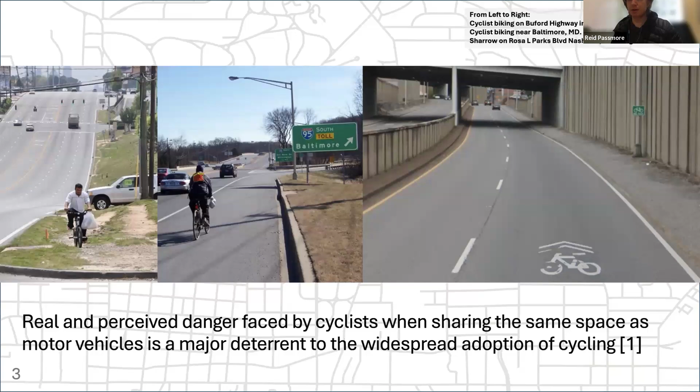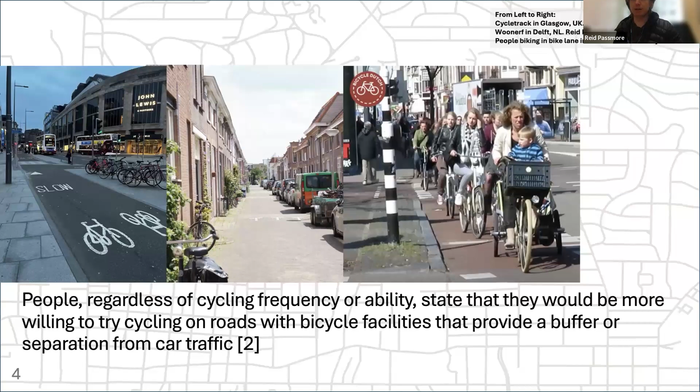Starting with the introduction: the real and perceived danger faced by cyclists when sharing the same space as motor vehicles is a major deterrent to the widespread adoption of cycling. People, regardless of cycling frequency or ability, state that they would be more willing to try cycling on roads with bicycle facilities that provide a buffer or separation from car traffic.

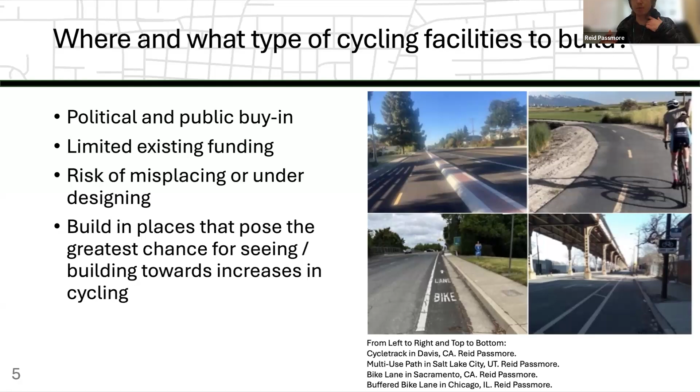But with these facilities, the question is, where do we put them and what types specifically do we build? They require political and public buy-in when there's often limited existing funding sources for them. There's also a risk of misplacing or under-designing bicycle facilities to the point that no one ends up using them. So ultimately, we want to build these facilities in places that pose the greatest chance for seeing or building towards future increases in cycling.

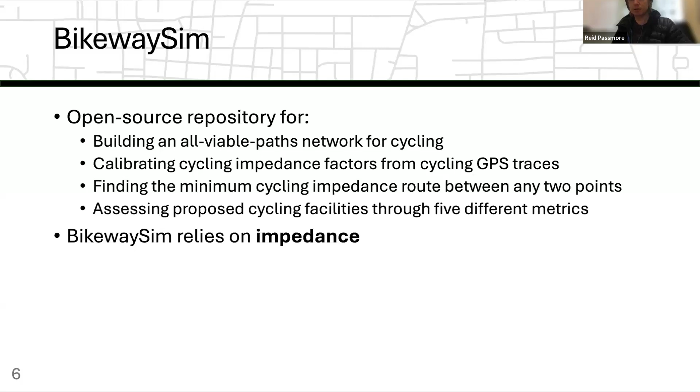To accomplish that, my dissertation was largely aligned with creating this tool called BikewaySim. It's an open source repository for building an all-viable-paths network for cycling, calibrating cycling impedance factors from cycling GPS traces, finding the minimum cycling impedance route between any two points, and assessing proposed cycling facilities through five different metrics. So BikewaySim primarily relies on impedance.

Impedance represents the relative cost or difficulty of travel. It can be in time units, dollars, or it can also be unitless. And it's relative, meaning that the difference between alternatives is what matters most. So for motor vehicles, impedance factors, which represent the different aspects of impedance, include travel time, parking, and tolls.

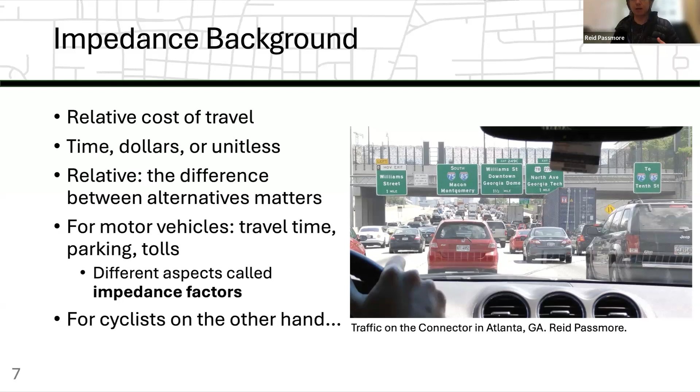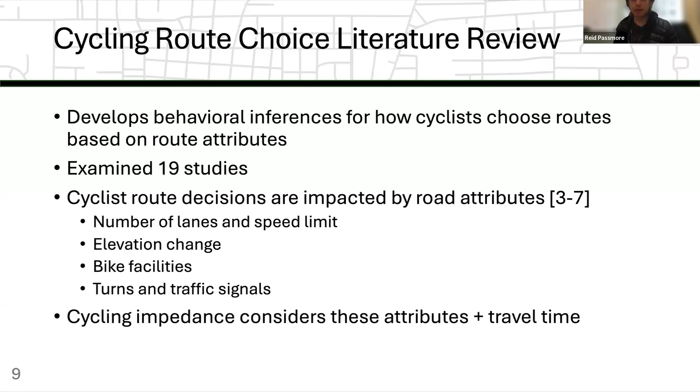But for cyclists, on the other hand, I had to consult the cycling route choice literature. Cycling route choice develops behavioral inferences for how cyclists choose routes based on route attributes. I looked at 19 different studies which showed that cyclist route decisions are impacted by road attributes, such as the number of lanes, the speed limit on a road, the elevation change along a route, the presence of bicycle facilities, and the frequency of turns and traffic signals. Ultimately, cycling impedance has to consider these attributes in addition to travel time.

When I was examining the cycling route choice literature, one gap that stood out to me is that while there was plenty of literature on estimating cycling route choice models, there was limited literature on actually applying these route choice models for estimating cycling impedance factors, which I'll get to in a future slide, and for planning bicycle facilities.

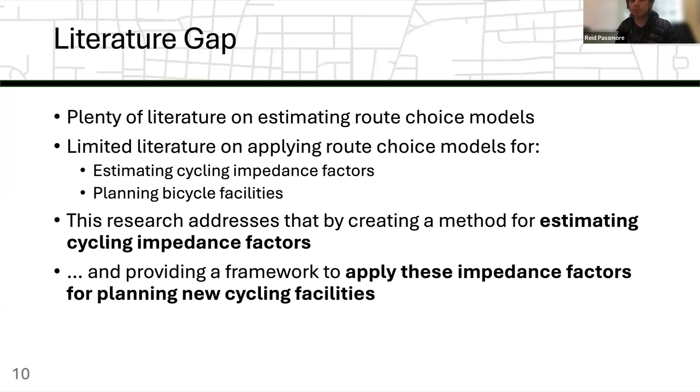This research addresses this gap by creating a method for estimating cycling impedance factors and then applying these impedance factors in a framework that can be used to plan new cycling facilities.

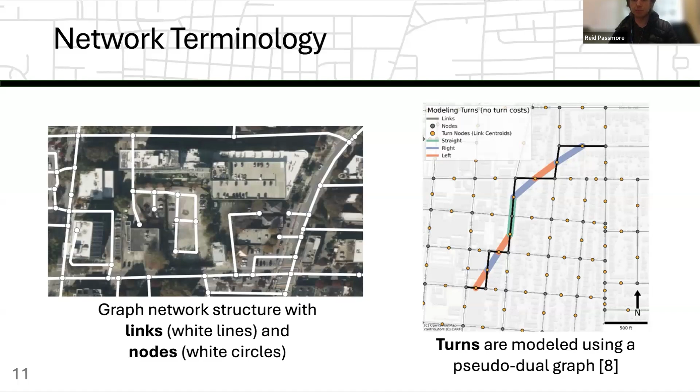Modeling routes with impedance factors: impedance functions are what actually apply the impedance factors to the network links and turns. Dijkstra's algorithm can then be used to find the least impedance route between any two points. If travel time is the only impedance factor being used, the resulting route is the least travel time route.

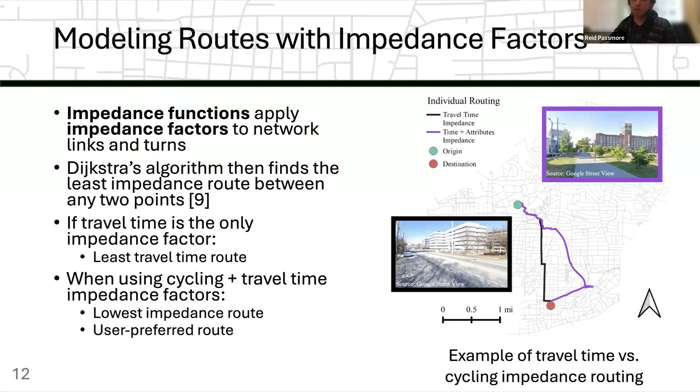The route on the right in purple takes the figure bordered in purple, the Atlanta Beltline multi-use trail. This is a lot more pleasant to bike on because you're separated from motor vehicles. But as we can see in the graphic, the purple route is more indirect. The impedance directs it off of high-stress facilities, such as that 4-lane arterial, and onto the multi-use path.

The next question is, how do we actually get these impedance factors to do this kind of work? In this work, we directly estimate them from cycling GPS traces, which I'll describe in the next slide.

We're utilizing a method, or building on top of a method, started by Schweizer et al. 2020, using stochastic optimization to estimate these impedance factors.

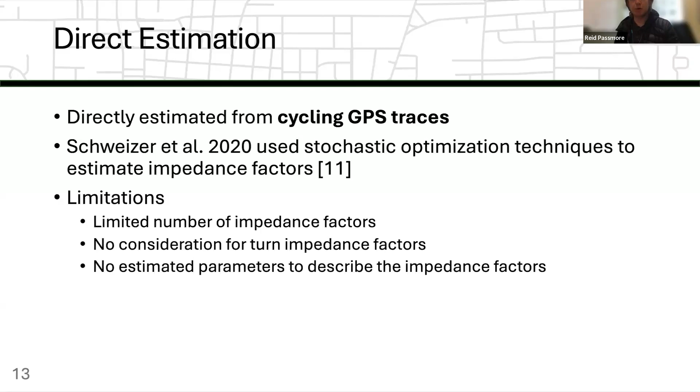Some limitations of this approach that we addressed in this work: they didn't consider very many impedance factors, and there was no consideration for turn impedance factors. And lastly, maybe most importantly, there weren't estimated parameters to describe the impedance factors, which I'll get to in a future slide.

A cycling GPS trace shows the second-by-second trajectory data of a cyclist, which shows how they navigated through a network. These traces have to be map-matched to the network.

Look at the figure on the right. The black dots represent the GPS trace, the second-by-second trajectory data. This data alone does not tell you which sequence of links were taken. That's what the map matching process does, and the red represents the map matching process.

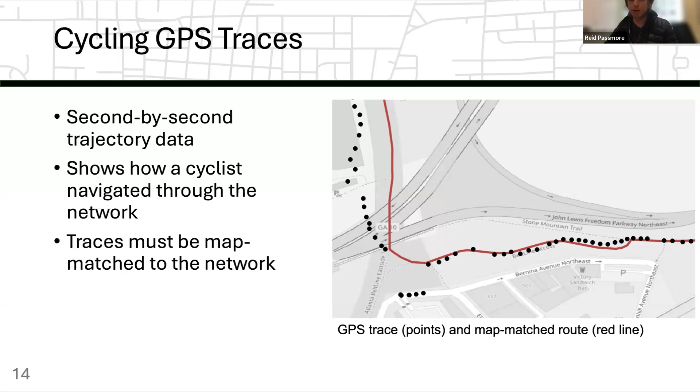So those are cycling GPS traces, and now that we have our direct estimation method, I'm going to describe the BikeWaySim impedance factor calibration methodology.

The optimization algorithm that we used was called particle swarm optimization. There are two main things I want to convey with this type of algorithm: one, it's population based.

We're testing multiple sets of candidate impedance factors, or cycling impedance factors, simultaneously. It also incorporates randomness, meaning that the initial selection of those candidate impedance factors, and the subsequent updates as the algorithm proceeds, incorporates randomness in how it updates.

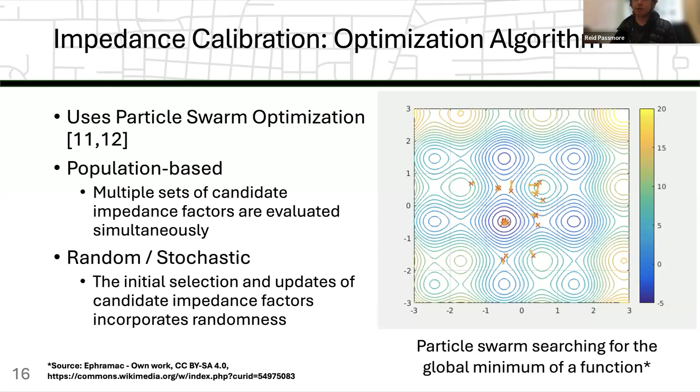A simple visualization of this process is shown on the right. We have these x's that start distributed throughout the graph, and they converge on what is the global minimum for this example function. We can see as the number of iterations proceeds, it starts to hone in. So that is a little bit about how that works.

Now I want to describe what the objective of this optimization process is for impedance calibration. Using link and turn impedance factors, which I'm going to represent with betas, we want to maximize the average similarity between the chosen and the modeled routes.

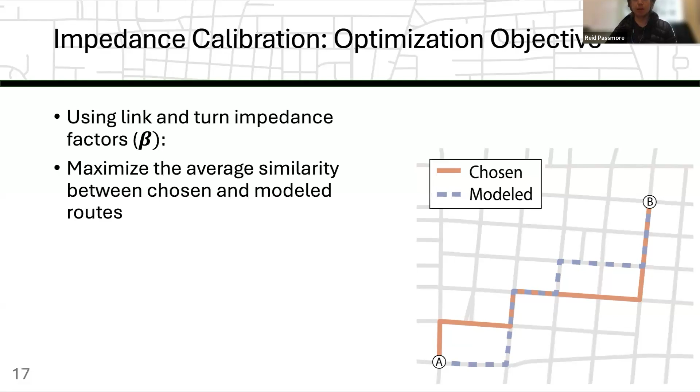This figure on the right shows the chosen route in orange, and the modeled route, modeled with our impedance factors, in a blue dashed line. It goes between point A and point B. We want to maximize the similarity between these two lines, and the way we do that is through the Jaccard index.

The Jaccard index measures the intersection of two objects over their union. This value is always between 0 and 1, 0 being no similarity whatsoever, and 1 being complete similarity.

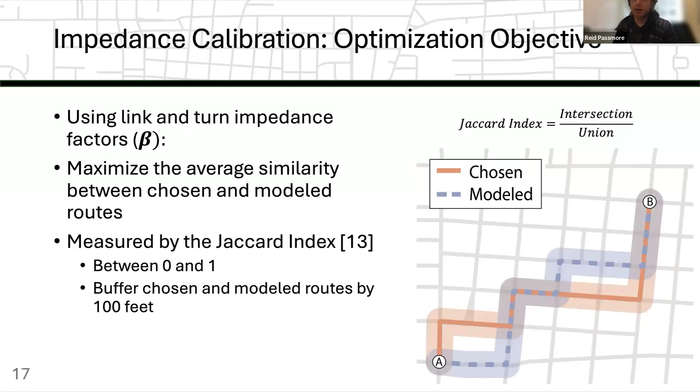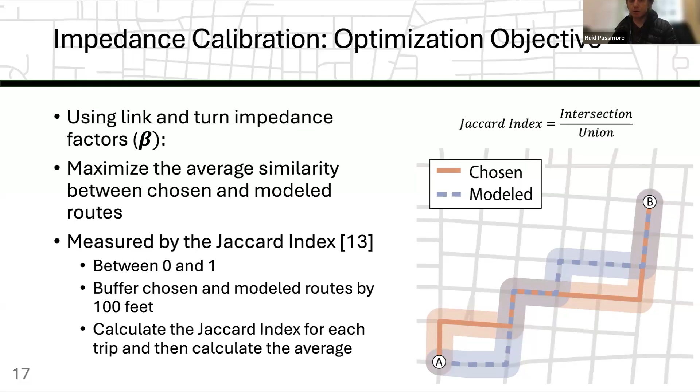The area of the routes, or the buffered area of the routes, are both buffered by 100 feet, and this area is used as the basis for calculating intersection and union. Essentially, we find the intersecting area, and then divide it by the net area or the union of the area. That gives us the Jaccard index for that trip, and then we average that across all the trips to get an average similarity metric.

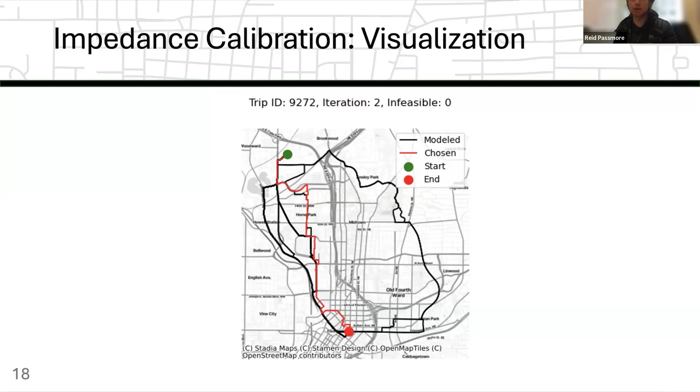The optimization method we're using is population-based, so there are multiple routes being tested at once. We can see it's searching throughout this street network, covering a wide variety of different routes, and some of these are closer to the chosen route than others. That is generally how that process proceeds.

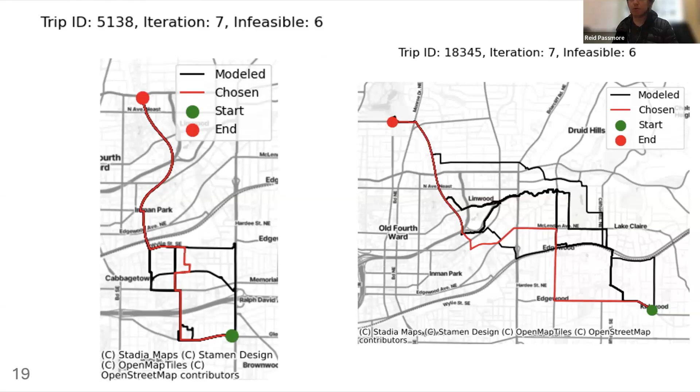It's important to remember that this is occurring across many trips at once, so whatever the final modeled route is, the resulting optimum route won't necessarily be the optimum for that one trip.

So that's the optimization process, and there's one additional step we add: the bootstrap method. This was developed by Efron and Tibshirani, and it allows us to estimate parameters for those impedance factors—the mean, the standard error, and the confidence interval—that would normally be infeasible to estimate by analytical means.

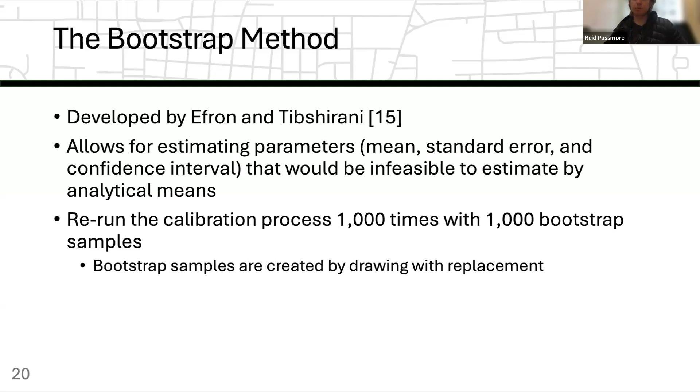Essentially, we rerun the calibration process 1,000 times with 1,000 bootstrap samples, where the bootstrap samples are created by drawing with replacement from our sample of chosen routes. So those two components, the optimization and the bootstrap method, make up the calibration methodology.

Now I'm going to go over what it looks like once we actually use real data. The GPS traces we're using come from an app called Cycle Atlanta that collected crowdsourced cycling GPS traces between 2012 and 2016. After processing and map matching this data, we had around 2,500 unique trips across 650 users.

We split this data into a training and a testing set. The training set incorporated one trip from each user selected at random, and the testing set was the remaining trips that were left over.

Next I'm going to go over the impedance factor coefficients, or the network variables that we used. I first want to direct your attention to the table. Starting with the first column, this indicates if the impedance factor was a link or a turn impedance factor. Moving on to the second column, this indicates the general category.

We had categories for the number of lanes, speed, the grade of the road, the presence of cycling facilities, a turn characteristic variable, and the type of turn movement. The third column, the last column, represents the actual specific variable name.

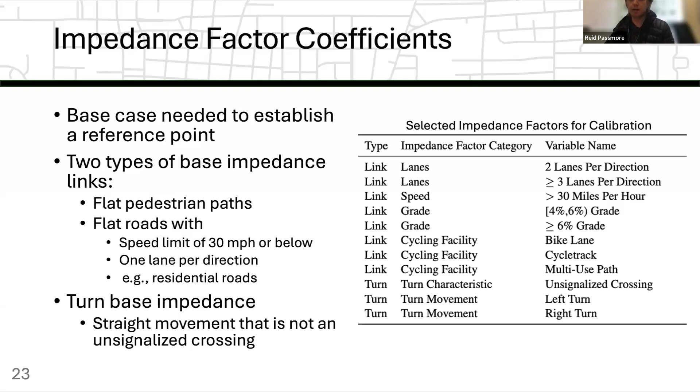Okay, moving on to the bootstrap model results. This is the large table that I want to walk through. The first column represents whether it was a turn or a link impedance, and the next column describes the units.

One thing I didn't describe in the previous slide was that link impedance is in proportional time units. So whenever we look at the beta values, which are in the mean column, it's going to represent a proportional increase in travel time. If it's a turn impedance, it's going to add just travel time, so it'll be in minutes.

So whenever we go to the beta values, starting at the first row and the column that says mean, it's 0.17. That indicates that the impedance relative to the base impedance, which is link travel time, is increased by 0.17 proportionally. If we go down to the turn column and see 1.22 for that unsignalized crossing variable, that indicates 1.22 minutes were added as a result of that impedance.

Proceeding, we have our variables, in the same order as the previous slide. Then we have our search bounds. One thing to mention is that particle swarm optimization is bounded, so you have to select some initial search bounds to start the process of searching for the optimum set of impedance factors. You can go outside the search bound in this process, but whenever you select your initial value, it starts in this area.

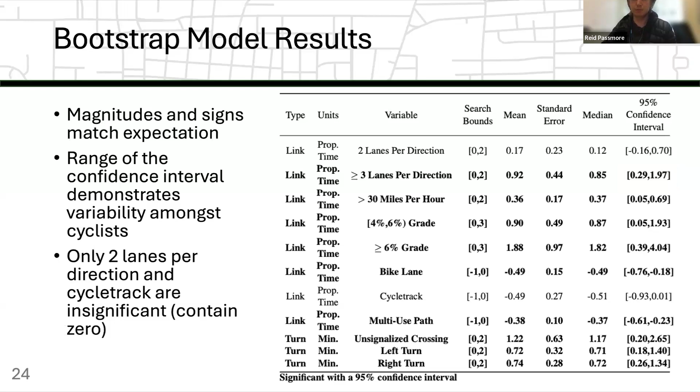All right, this next slide is going to show you how the different impedance factors combine. The first column is for the speed limit, the next column is for the lanes per direction, and the following 4 columns are different link types. The first is a pedestrian path.

The second is a multi-use path, and then a road with a bike lane. So the main things I want to get from this are first the link base impedance. So we set these to be pedestrian paths and then roads with a speed limit less than 30 miles per hour, and then 1 lane per direction. So that shows up as 0 as we set it to be.

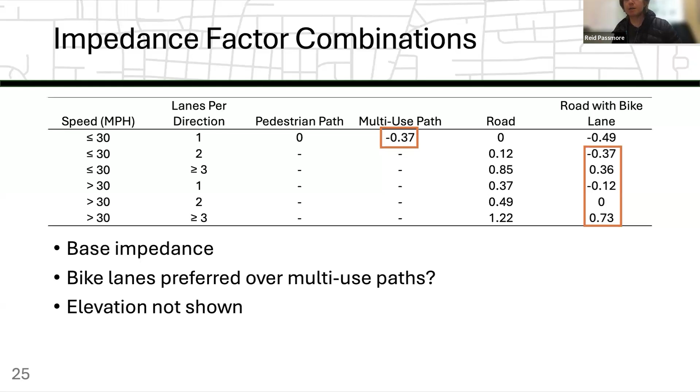And then the other thing you may have noticed from the previous slide is that the road with bike lane impedance factor is actually more negative, meaning it has a greater impedance reduction effect than the multi-use path variable. This may seem counterintuitive initially because multi-use paths provide complete separation from motor vehicles. But once you consider that bike lanes can interact with other impedance factors roads have, such as speed limit and lanes per direction, it starts to make more sense. So as you increase the speed or lanes per direction, that impedance reduction effect from bike lanes starts to dwindle.

All right, next I'm going to go over the objective function value. So again, the objective function was this Jaccard index that ranged from 0 to 1, and we recalculated the Jaccard index for each trip using the median impedance factors from that bootstrap model table a while ago. And then when we calculated the average for the training set, the calibrated impedance factors value was 0.47. And using just the travel time impedance, it was 0.36. So there was a 30% increase from one to the other.

And then for the testing set, that value was 0.43 and 0.37. So that was a slightly less increase in Jaccard index, 16%. So this indicates that there's still room for improvement.

And to further illustrate exactly where these improvements were made in explaining the chosen path, I want to direct your attention to the figure on the right. This is a histogram of the Jaccard index values for each trip using both the shortest impedance factor and the calibrated impedance factor, shown in gray and blue respectively. The x-axis ranges from 0 to 1, since that's the Jaccard index range.

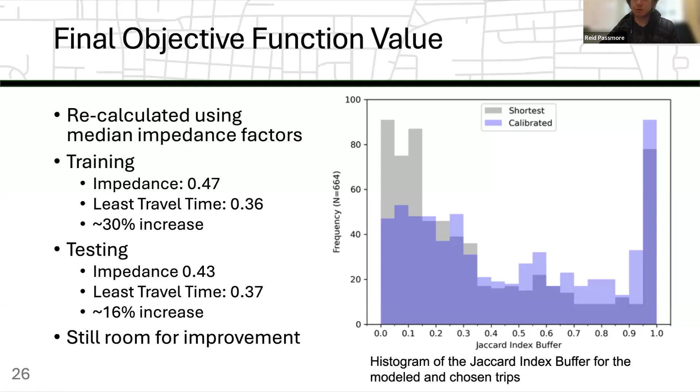And when we're going from the shortest to the calibrated in this 0 to around 0.25 range, we see a reduction, meaning more trips are being explained using the calibrated impedance factors. So the blue distribution is shifting to the right relative to the gray distribution, showing where exactly we're making improvements in explaining those trips.

All right, so some limitations of this approach are that trips have to be destination oriented, meaning travel time must be an impedance. So exercise trips, recreational rides, and group rides cannot be used for this. And loop trips, where the origin and destination are one and the same, also do not work.

There are issues with the Cycle Atlanta data. They tended to be overrepresented by white college-educated men, and this was exacerbated by this being the early smartphone days when this data was collected. The sampling method wasn't the most rigorous used.

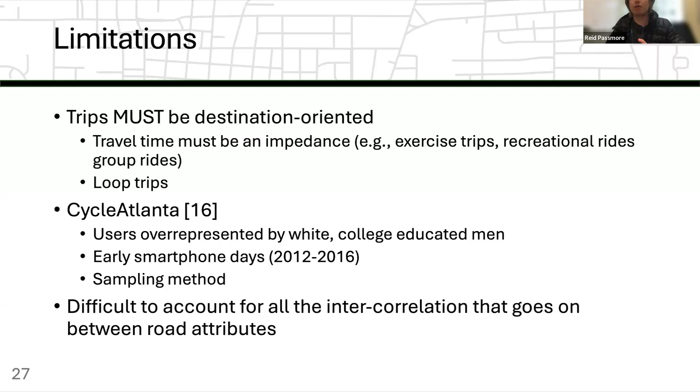And then the last thing associated with this is that whenever we're calibrating the impedance factors, it is very difficult to account for all the intercorrelation that goes on between the different road attributes.

So some future work suggestions associated with this are collecting GPS trace data through travel diaries gathered through more rigorous sampling methods that would hopefully allow us to estimate more generalizable impedance factors. If this is infeasible, one potential idea I had was using suggested routes from local cyclists or advocacy organizations to develop a priori impedance factors that can later be readjusted once actual data is collected. Additionally, collect detailed network data, and these two data collection suggestions in combination will allow us to calibrate more impedance factors as that data becomes available.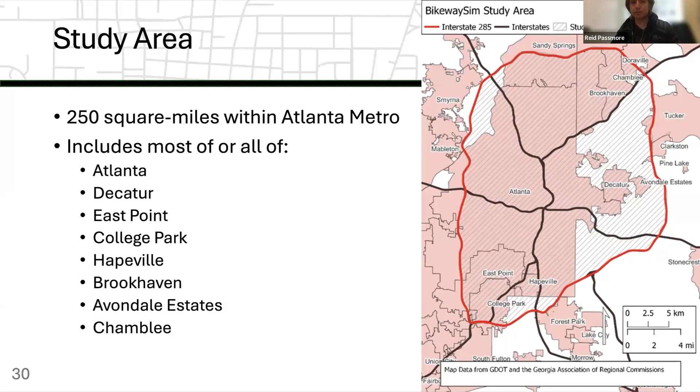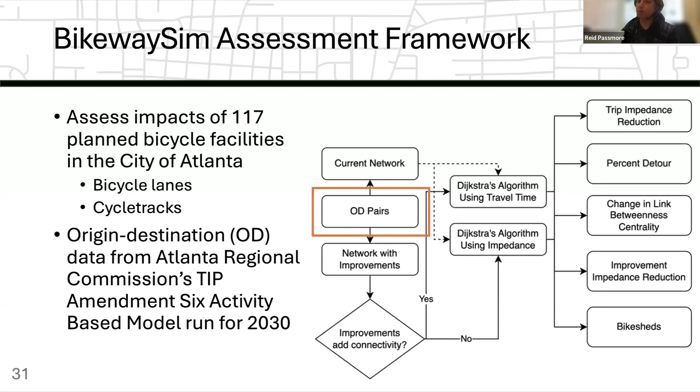We're going to assess the impacts of 117 planned bicycle facilities in the city of Atlanta, including bicycle lanes and cycle tracks. We're using origin destination data from the Atlanta Regional Commission's TIP Amendment 6 activity-based model run for the year 2030. So the first part of this process, we're going to start with the OD pairs.

The OD pairs that we're using correspond to traffic analysis zones. We pre-processed the data to remove any trips above 3 miles and to also remove intrazonal trips. We matched each TAZ centroid to the nearest network node by Euclidean distance so we could do shortest path routing. This led to a final OD count of 1,100 TAZs, constituting 130,000 unique OD pairs, representing 3.5 million trips, which had 650,000 people across 480,000 households.

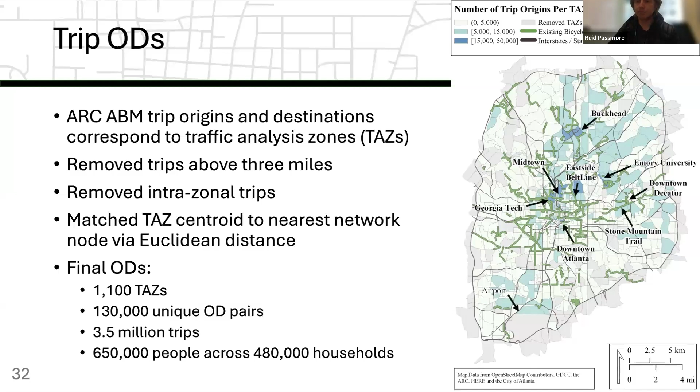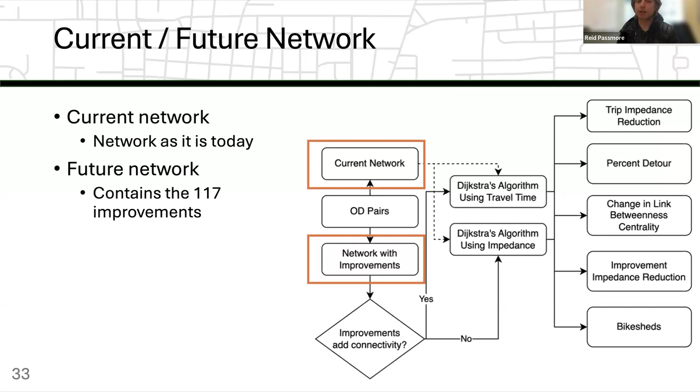All right, next I'm going to move on to the next step of the process. We're going to establish the current network — that is the street network as it is today, so no improvements, just as it is. Then the future network is the network that's going to contain the 117 improvements that we're going to evaluate.

Once we have those two networks, we can use Dijkstra's algorithm to find the lowest cost route between any two points. This is run twice for the current network — first using travel time as the impedance factor, then using the calibrated impedance factors. It's run once for the future network using just the calibrated impedance factors.

These routes are then stored to generate 5 different approaches that show the impacts of the proposed bicycle facilities. Due to time constraints, I'm going to only go over 3 of these, which are trip impedance reduction, improvement impedance reduction, and bike sheds.

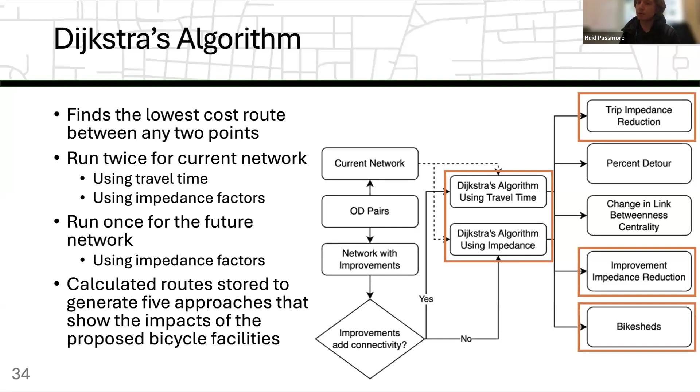This isn't only because of proximity to the added bicycle facilities, but also because there's a lack of existing low-stress bicycle facilities in this area. If you've ever been to downtown Atlanta, there are many one-way streets up to 5 lanes wide that facilitate high-speed vehicle traffic, and they're not pleasant to bike on.

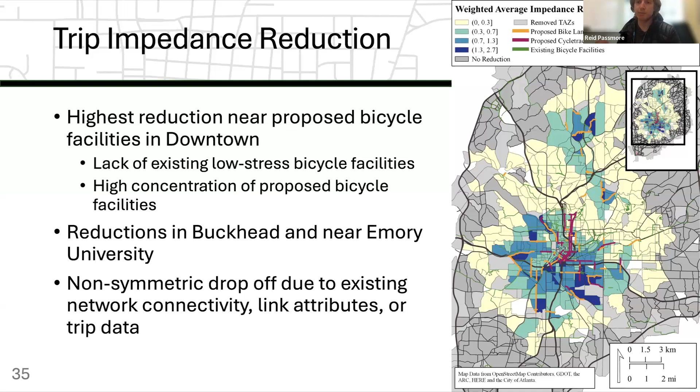If there are many high-stress links or high impedance links near the proposed bicycle facilities, then it's going to limit the bicycle facility's ability to mitigate that. And also, if there are fewer trips from certain TAZs that go to the destinations that utilize the bicycle facilities, then that would also reduce that average impedance reduction.

All right, then the next one I'm going to look at is the impedance contribution from each facility, or impedance reduction contribution from each facility. This metric measures each bicycle facility's effectiveness at reducing trip impedance. So in the previous slide, we were looking at it from that origin or TAZ perspective, and this time we're looking at just the facilities.

This measure considers a link's impedance reduction from the added bicycle facility, the total length of the bicycle facility, which can often span across multiple blocks, so it often isn't contained to just one link. And then it also considers the link betweenness centrality, which measures how many users used a link as part of the least impedance path.

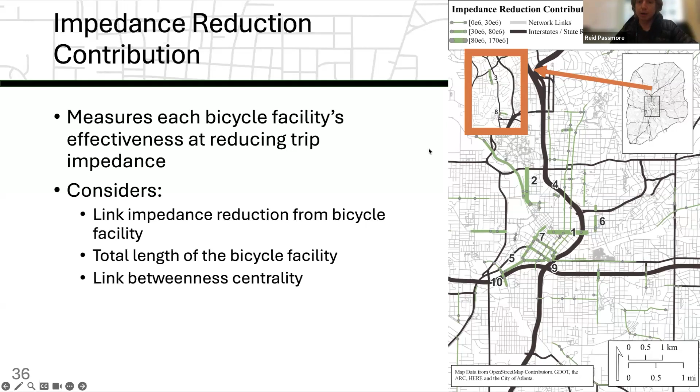A couple things to note about this graph: the green represents the added bicycle facilities, and they are symbolized according to size. So the greater the size of the bicycle facility, the higher the impedance reduction contribution. You may notice that they're labeled with numbers, and these numbers represent a ranking based on the facility's impedance reduction contribution. I also want to point out that this orange box here is to the north of the zoomed in area that we see in the map below.

This was near Buckhead, and I just added it here because some of the higher impedance reduction facilities showed up in this area. So conceptually, as someone familiar with the study area, these results do make sense. This Edgewood Avenue, the one highlighted right now, is a major connector for people that live in the more residential part of Atlanta to get to downtown Atlanta, which has a lot of jobs. So adding a bicycle facility in this area, especially when the highway acts as a border that often decreases the number of alternative routes, this would be a high impact facility.

And then the other one also makes intuitive sense. This is Luckie Street Northwest. It's a major connector between Georgia Tech, which is slightly north of it, and downtown, which is slightly south of it.

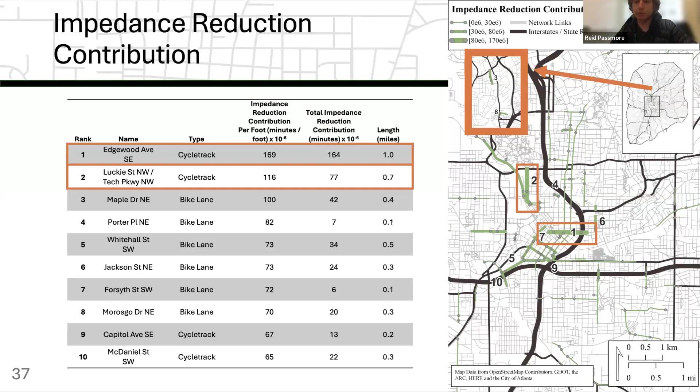All right, so the next metric I'm going to go over is bike sheds. These are localized to a specific origin, whereas the previous ones we had been looking at the entire study area. These start from one point, and represent the extent of the network or destinations one can access by bike within specified constraints.

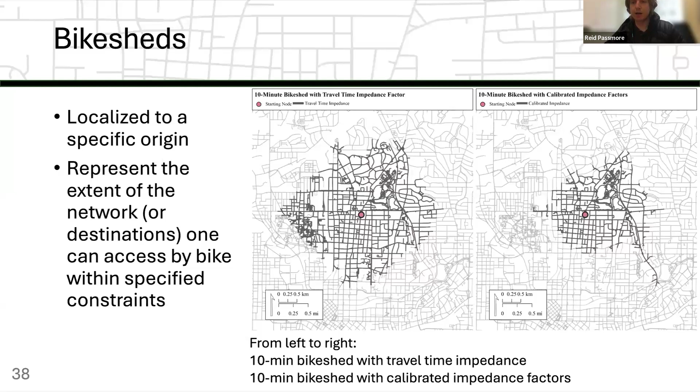What you'll notice is that the black lines, the areas that you can reach, the shape of that is different between the two. That's because when you add in the cycling impedance factors, you're modifying the areas that you can reach, because certain areas are such high impedance that you can no longer reach them, and some areas have reduced impedance so you can now reach them.

So the area here that was added was along the Atlanta Beltline, which is a multi-use path. And if we go back to the bootstrap model table, we know that the impedance factor for multi-use path is negative, so that's why we see that addition.

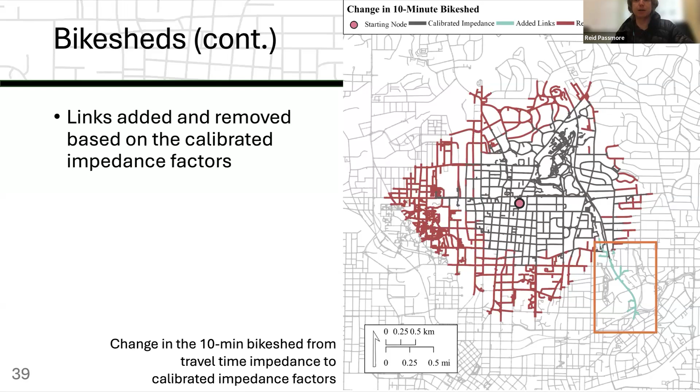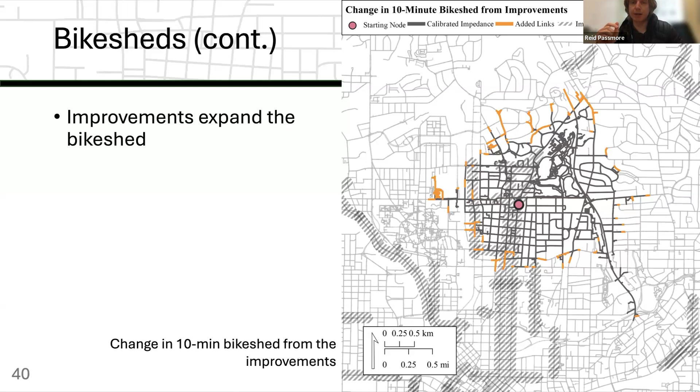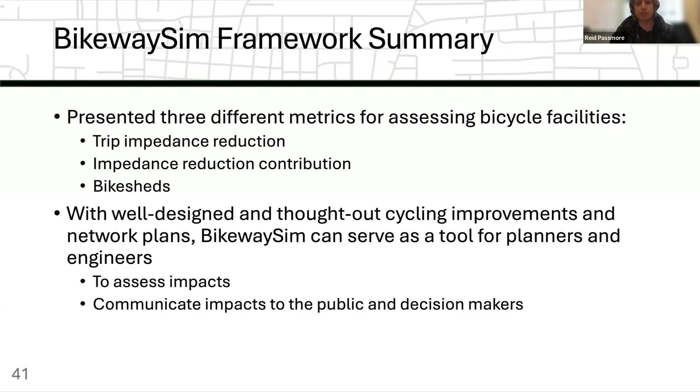To summarize, I presented three different metrics for assessing bicycle facilities: trip impedance reduction, contribution, and bike sheds. With well-designed and thought-out cycling improvements and network plans, BikewaySim can serve as a tool for planners and engineers to assess impacts and communicate them to the public and decision makers.

Moving on to my last section, policy implications and future research. Starting with policy implications, the reduction of cycling impedance can be used as a leading indicator for future increases in cycling activity in areas with few existing cycling facilities or cyclists. Planners and engineers can present these results to decision makers and the public as supporting evidence for building bicycle facilities. BikewaySim can be actively implemented in evaluating different project alternatives, developing cycling master plans, and the evaluation process for active transportation grant programs.

Some requirements for running BikewaySim today: right now it's a collection of Python scripts, so knowledge of Python is currently required. A study area needs to be provided, and ideally, cycling GPS traces for that study area if available. If those are not available, then the impedance factors calibrated using the Atlanta cycling data can act as a placeholder.

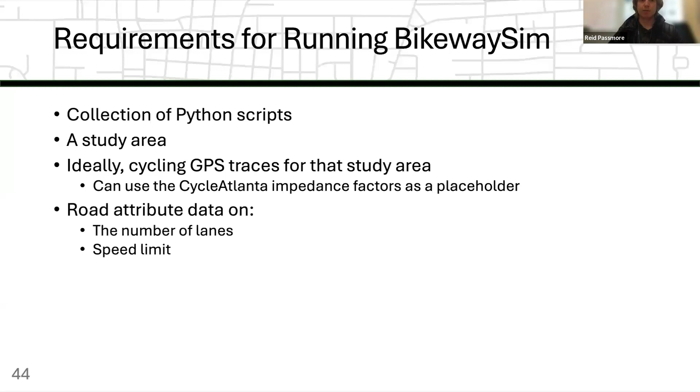For now, road attribute data on the number of lanes and the speed limit does need to be provided. But other data, such as network data, traffic signals, and the presence of bicycle facilities, can actually be pulled from OpenStreetMap, which BikewaySim provides scripts for getting, and elevation data can be retrieved from USGS. The last thing that needs to be provided are the actual proposed cycling facilities.

Onto the future development of BikewaySim: it's open source, so it can be adopted and modified by other researchers, state DOTs, MPOs, or cities. It can be most improved by collecting more detailed road attribute data and bicycling facility data, and collecting cycling GPS traces. Both of these would allow for more nuanced impedance factors to be developed to evaluate the impacts of non-bicycle infrastructure projects such as road diets and traffic calming.

BikewaySim and other sims are open source, as I stated, and they're supported by funding provided by the National Center for Sustainable Transportation.

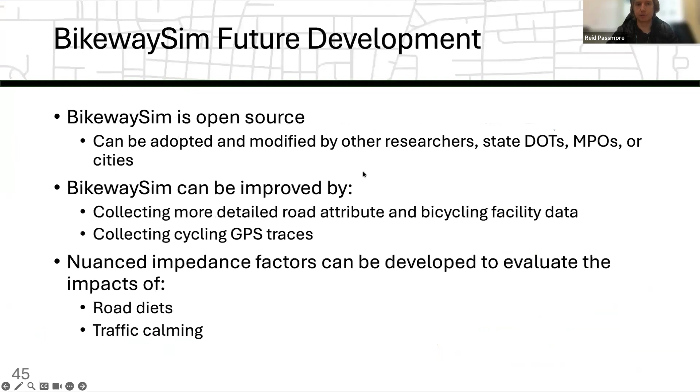Again, it is a collection of Python scripts, so it definitely takes some knowledge to actually use this currently. But the absolute minimum data requirements are providing a bounding box, so a study area, and then, if available, road attributes like number of lanes or speed limit. But if this is not available, it doesn't necessarily need to be provided. BikewaySim has scripts for actually gathering most of the data it needs—it gathers OpenStreetMap data from a site called Geofabrik, and elevation data from the USGS. The other data requirement is providing bicycle facilities so that you can actually assess the impacts of them.

Great. And I don't recall if you answered this one already. How should planners rank impedance, cycling network connectivity, and safety when deciding what bike infrastructure to build? Yeah, I didn't get to that one.

This hints at something I said in an earlier slide, where this still requires planners and engineers to provide well thought out cycling infrastructure suggestions. I think impedance and comfort go hand in hand, in that impedance is some representation of comfort, but safety is a separate, somewhat aligned method with some crossover. If you're actually having safety issues and trying to reduce crashes, this approach isn't necessarily going to cover that.